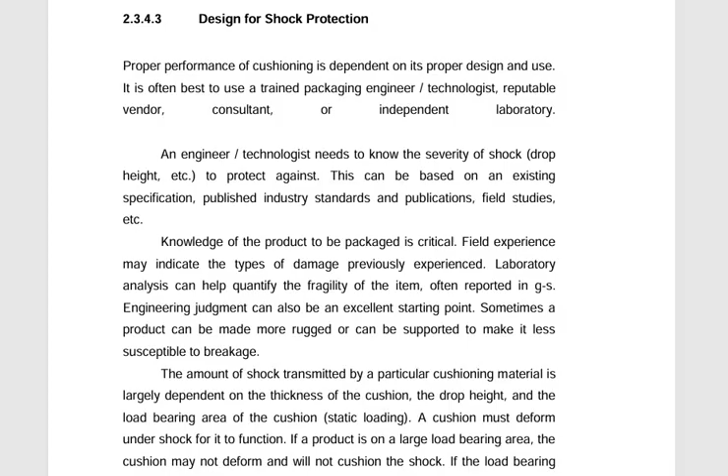Hari tu saya recap sikit video sebelum ni kita dah tengok design for shock protection. So I won't stress too much on this. Awak boleh baca sendiri design for shock protection and design for vibration protection. Okay, ini dua perkara penting yang kita kena capture untuk buat, sebab kenapa kita nak buat cushioning tu.

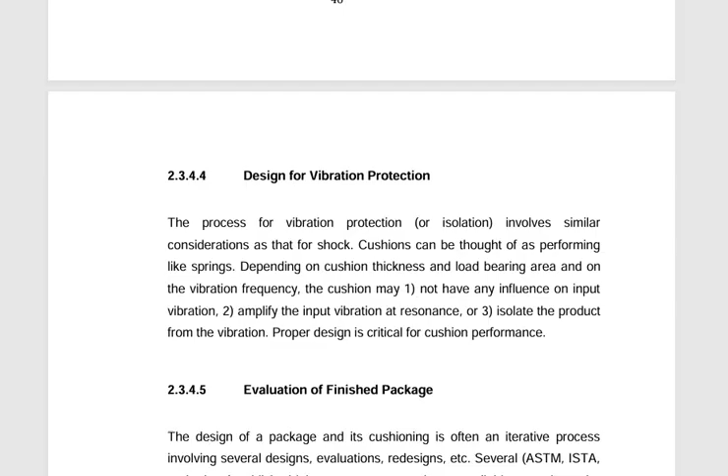Kemudian kita pergi ke 2.3.4.5 evaluation of finished package. Yang ini ada satu soalan dekat test ditanya. The design of package and its cushioning is often an iterative process involving several design, evaluation, redesign, and so on. Several published laboratory test protocols are available to evaluate the performance of proposed package.

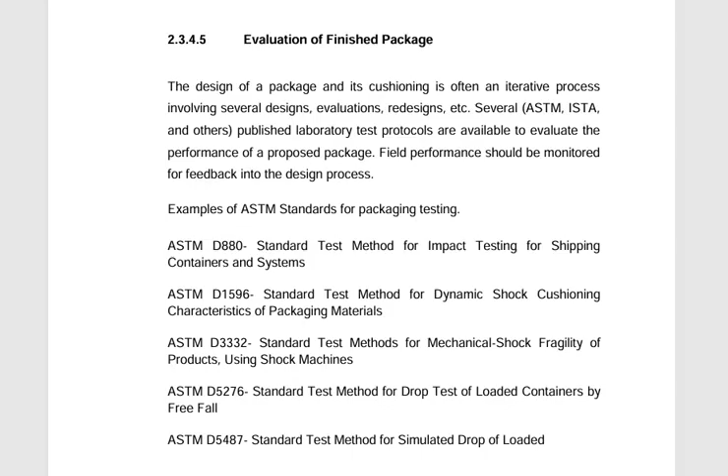Test protokol lab ni dia ada standards dia. Standard dia biasanya ada badan-badan yang tetapkan yang bagi guideline of the standards tu, contohnya ASTM, ISTA. Field performance should be monitored for feedback into the design process. Example of ASTM standard for packaging testing. Kenapa kita ada standard-standard ni? Bila kita nak buat testing, kita kena pastikan testing yang kita buat tu mencapai satu standard yang dah ditetapkan, dan standard tu diiktiraf oleh global.

Maksudnya kalau packaging design kita dah dijalankan test mengikut standard ASTM, so packaging ni kita yakin sebab badan tu dah diiktiraf, contohnya macam ASTM ni.

Standard dia untuk buat test, contohnya ASTM D880, standard test method for impact testing for shipping containers and system. ASTM D1596, standard test method for dynamic shock cushioning characteristic of packaging material. Kemudian ASTM D3332, standard test method for mechanical shock fragility of product using shock machines. Tadi tu shock cushioning kena ASTM D1596, lepas tu yang ni mechanical shock fragility.

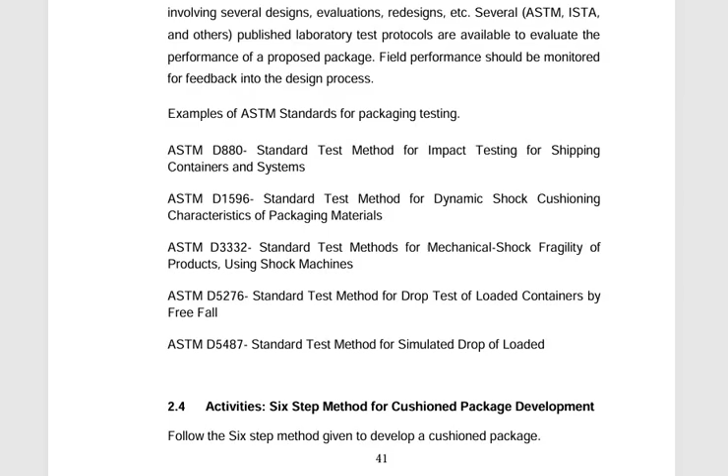Ini ASTM D3332, yang ini untuk apa? Yang ASTM D880 tadi, standard test method for impact testing for shipping containers. ASTM D5276, standard test method for drop test untuk containers dengan free fall. Lepas tu ASTM D5487, standard test method for simulated drop of loaded containers. Itulah standard-standard yang kita ada untuk buat test dekat packaging kita.

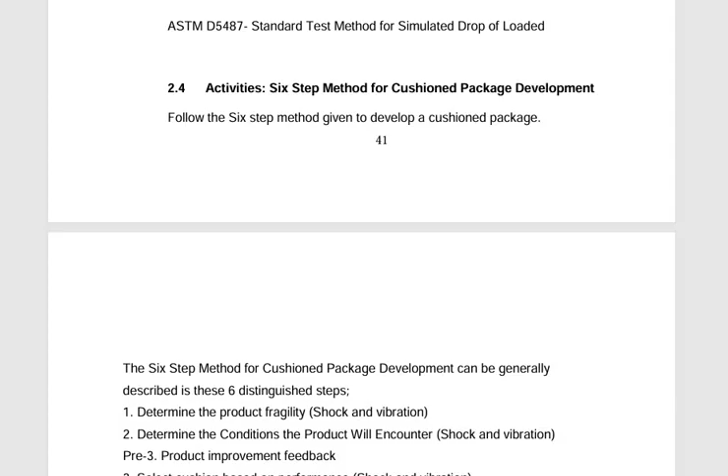Seterusnya 2.4, kita masuk activity 6-step method for cushioned package development. Follow the 6-step method given to develop the cushion package. Nak develop cushioned package kita, dia ada 6 step yang kita kena buat. 6 step ni ada ditanya dekat dalam test dan juga final, so tolong betul-betul hafal 6 step ni sebab ada ditanya.

The 6-step method for cushioned package development can be generally described as these 6 distinguished steps. Kalau kita tengok yang pertama, determine the product fragility, shock and vibration, dari segi shock dan juga vibration. Yang pertama kita kena tengok product fragility dia, macam mana dia, maksudnya lebih pada material of the products. How fragile the product is, boleh pecah ke tak dan sebagainya. And then, determine the condition of product will encounter.

Apa condition yang bakal dihadapi oleh produk, mungkin sama shock dan vibration. Step 3 ni dia ada pre-step, okay, product improvement feedback. Lepas kita tentukan determine condition and product will encounter, kita kena buat improvement sikit pada produk tu. Lepas tu barulah kita masuk step ketiga, select cushion based on performance. Daripada produk yang kita dah improve, dan kita dah tentukan condition how the product will encounter shock and vibration, barulah kita select cushion method based on the performance.

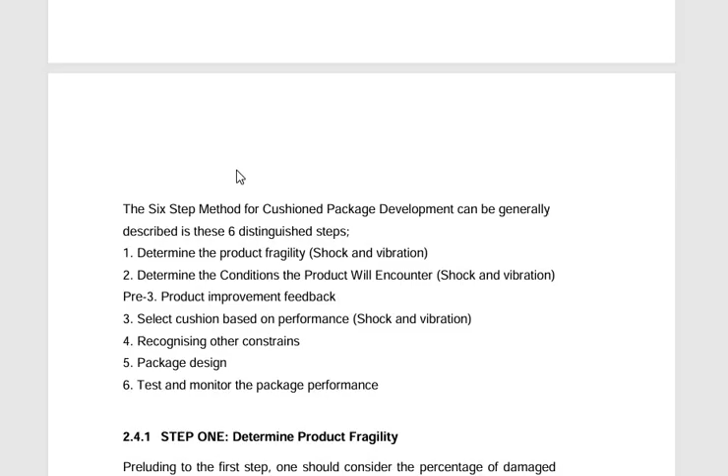Okay, so kita ada 6 step ni, detail of the step tu boleh baca kat bawah. Contohnya step 1, determine product fragility, apa yang kita nak buat. Preluding to the first step, one should consider the percentage of damaged product acceptable to the manufacturer and customer. Ini kena tengok dulu percentage of damaged products yang acceptable. Notice the many products where no cushioning is required in the packaging, example, biscuit.

The first step towards determining the amount of cushioning for a product required is to determine the amount of mechanical shock the product can survive on its own. There are several common terms for this, with fragility and G factor being the most common. Fragility is normally expressed in units of G and indicates the maximum deceleration the product can withstand without being damaged. The more fragile the product is, the lower its G factor.

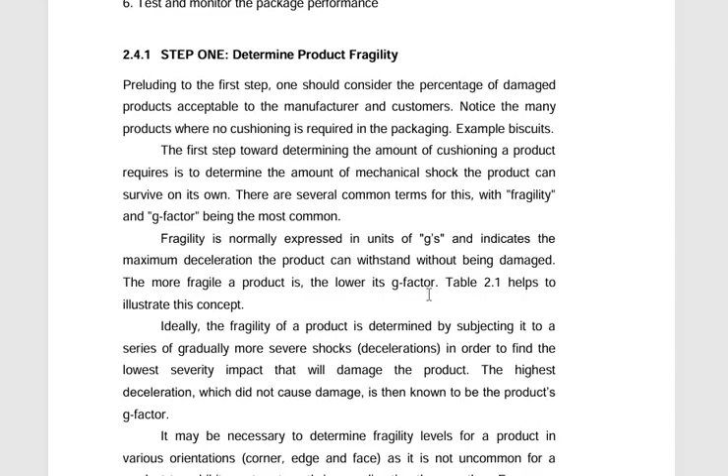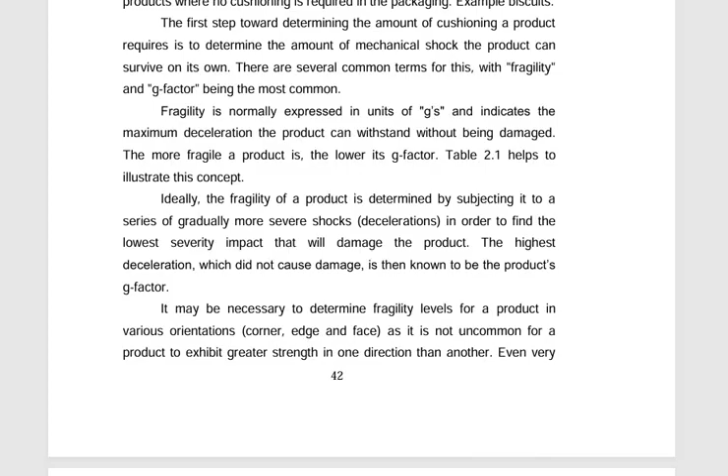Maksudnya kat sini kalau produk yang mudah pecah, dia punya G factor rendah. Kalau produk yang keras sikit, G factor dia tinggi. Table 2.1 help to illustrate this concept, boleh tengok table 2.1. Yang ini yang paling mudah pecah.

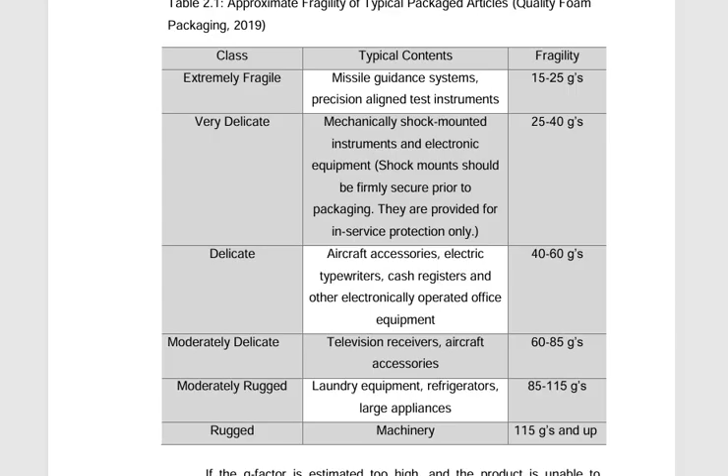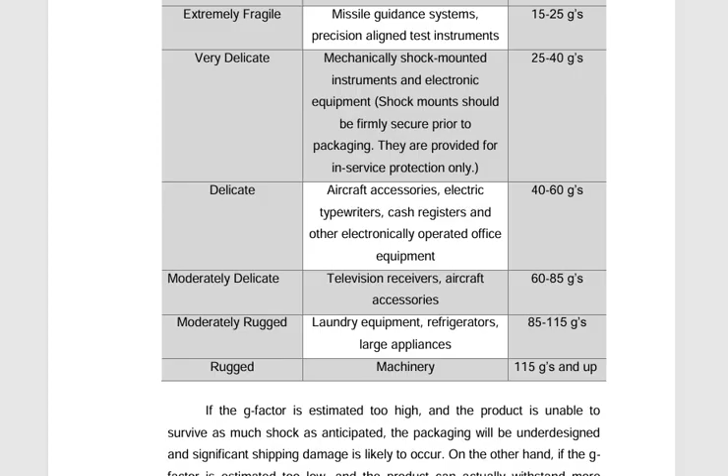Alright, lepas tu kita sambung lagi. Ideally, the fragility of a product is determined by subjecting it to a series of gradually more severe shock deceleration in order to find the lowest severity impact that will damage the product. The highest deceleration which did not cause damage is then known to be the product's G factor.

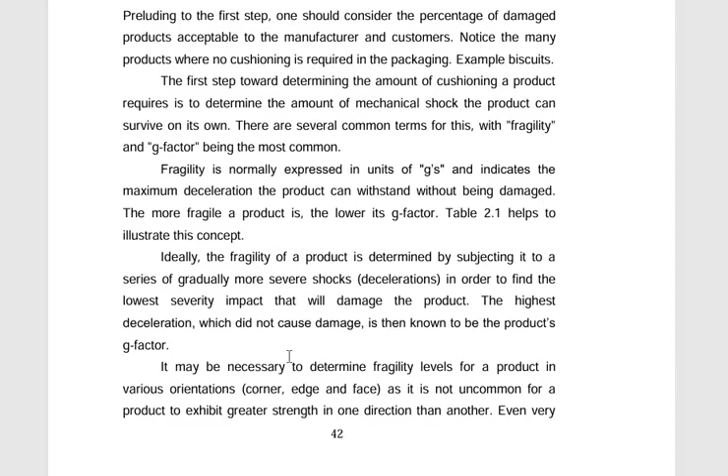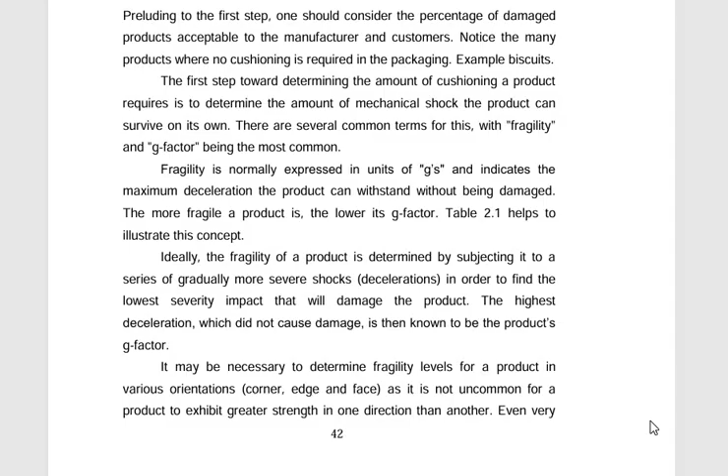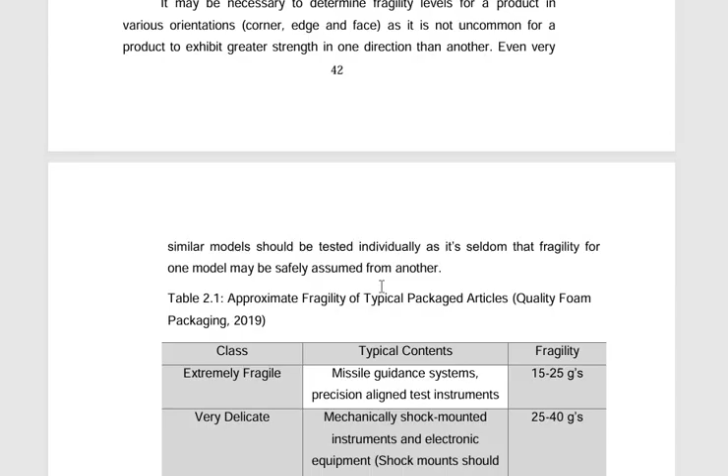It may be necessary to determine fragility level for a product in various orientation: corner, edge and face. It is not uncommon for a product to exhibit greater strength in one direction than another. Okay, even very similar models should be tested individually, as it's seldom that fragility for one model may be safely assumed from another. Okay, alright.

So okay, if the G factor is estimated too high and the product is unable to survive as much shock as anticipated, the packaging will be under-designed and significant shipping damage is likely to occur.

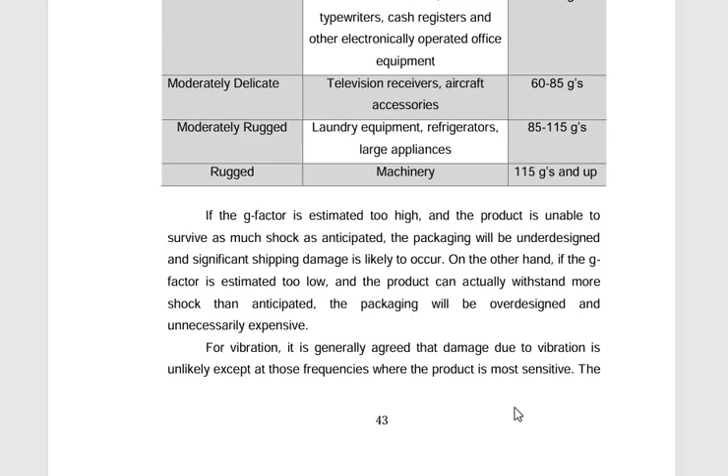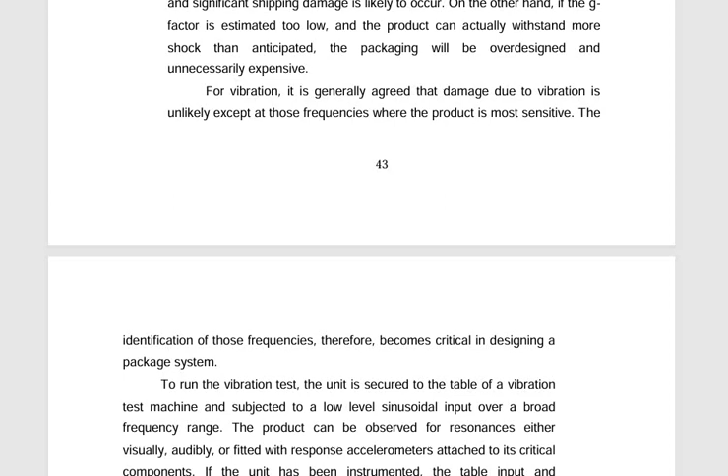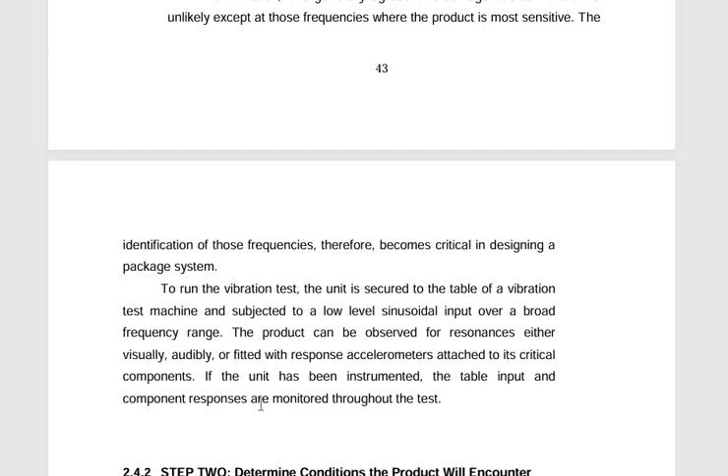Okay, for vibration, it is generally agreed that damage due to vibration is unlikely except for those frequencies where the product is most sensitive. Okay, yang ini untuk vibration pula. The identification of those frequencies therefore becomes critical in designing a package system. To run the vibration test, the unit is secured to the table of the vibration test machine and subjected to a low level sinusoidal input of a broad frequency range. The product can be observed for resonance either visually, audibly, or fitted with response accelerometers attached to its critical component. If the unit has been instrumented, the table inputs and component response are monitored throughout the test.

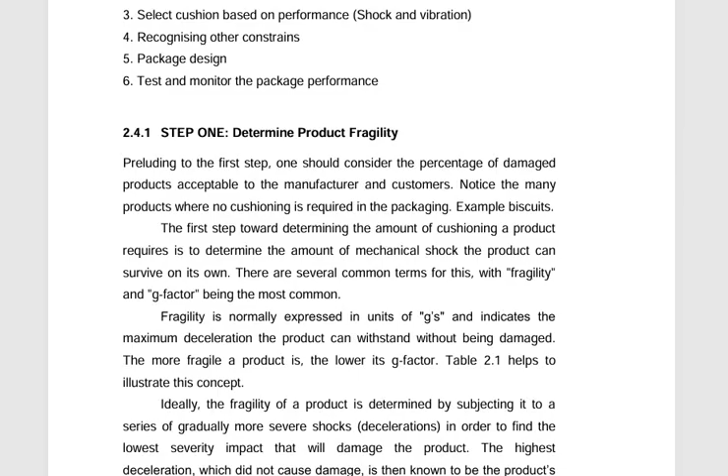Okay, alright. Next, consider the handling and transportation environment the product will face. It would be nice to follow every package through the distribution environment and observe what actually happened to it. There are various modes of distribution. The package designer should know every transition and hazard. One should be aware of all hazards along the way. For example, an imported product may face different climates, multiple transportation. The hazard and the strength of the hazard include accidental drop during handling, vehicle vibration, shock input, temperature extreme, humidity level, compression load. The focus is on shock and vibration.